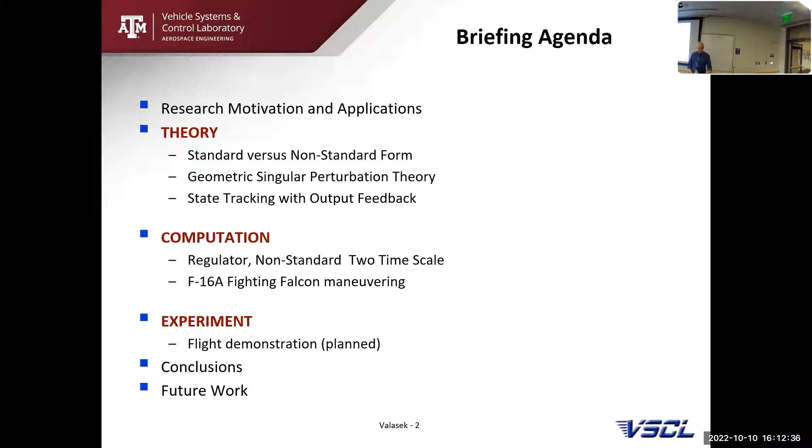For the lab, just really briefly to talk about the things that we do, you can see all of those. The two newest ones are quantum control and cybersecurity. I'm getting into quantum control because I have a student working on that for his dissertation, and he's already got two journal publications. That's brand new, he started with me in June. And then the other thing is cybersecurity.

We've been working on cyber controller acquisitions, which is the nice word for a hack attack on it. That's to be able to take over UAS. We're not touching GPS at all, this has nothing to do with GPS. This is saying, can I go into the controller, can I take over the controller and make the system do what I want? And the answer is yes. We've developed the theory on it, have several publications already, and we've been flying it a lot.

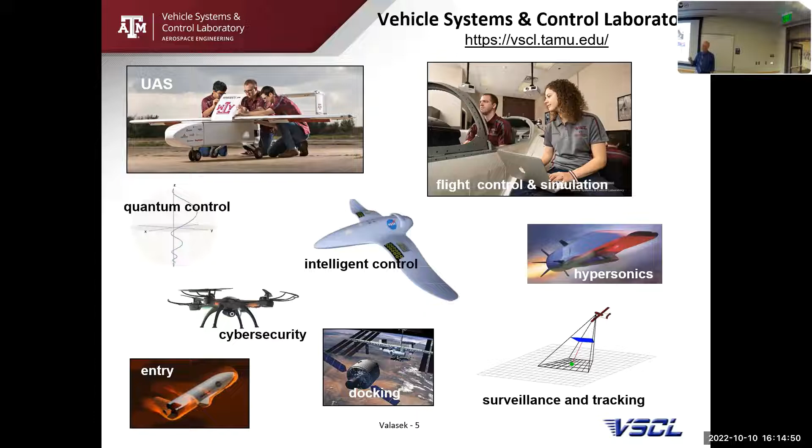The nice thing about it is you don't really have to have much information on the controller, you just have to get it on there. So we're not doing the vector to get that on, but once you get that on there, it'll take over the controller. And again, nothing to do with GPS on that. So that's kind of new.

For the field expertise, we've been flying UAS for a lot of years, 23 years, all under FAA there. I've done a lot of flights and a lot of programs and been flying a lot of different vehicles, rotorcraft, fixed wing. That one's a 450 pounder, the powered parafoil.

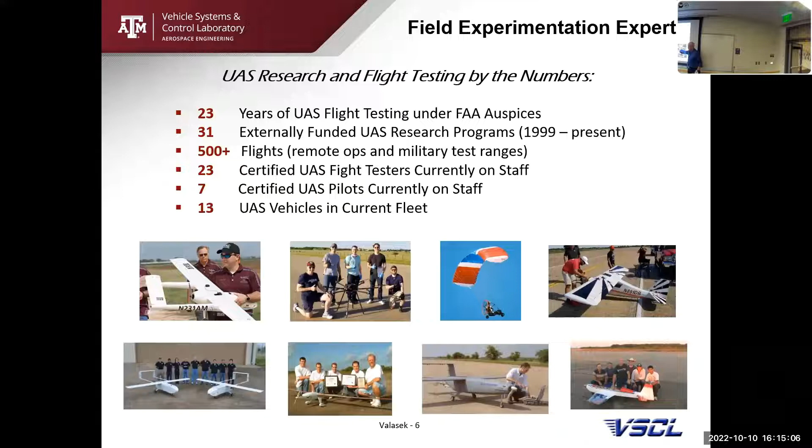Before I start the presentation formally, that's now our background. I want to recognize somebody. This is an alumnus of your department.

Dr. Jan Roskam got his PhD in 1965. He passed away three weeks ago, just after his 92nd birthday. World famous, he has taught airplane design at the University of Kansas since 1966 and taught it internationally. They said they put together 11,000 people he has taught airplane design to. A real giant in the field, nice guy. He was on my master's committee and he was on my PhD committee too, as a committee member. So you guys are very honored to have him as an alumnus. He worked at Boeing at the time and then was getting his PhD after doing that.

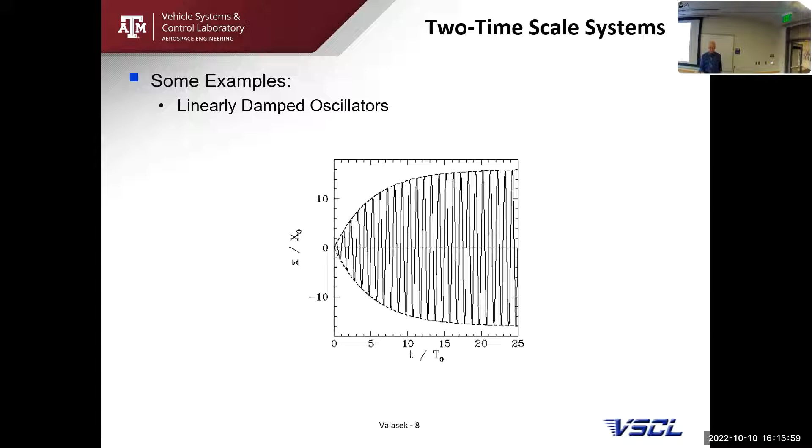Okay, so let's talk about some two timescale systems. First, I can have linearly damped oscillators, and those are not too terribly interesting. I can have a flexible beam where I'll have the beam motion as you see theta moving, and then I'll have the tip deflecting. If I go into the aerospace example, now it gets a lot more interesting because I have phugoid on the top, short period on the bottom.

So phugoid is going to be a very low frequency, low damped mode, short period high frequency, high damped. You're going to see phugoid expressed in velocity and pitch attitude angle. You're going to see short period expressed in angle of attack, and then a body axis pitch rate. So when you're looking at the scales on these, it's a little hard to tell, but you see up on the left there, the vertical goes to 8,000 on phugoid, and this one is like to 80. So you're off by at least an order of magnitude.

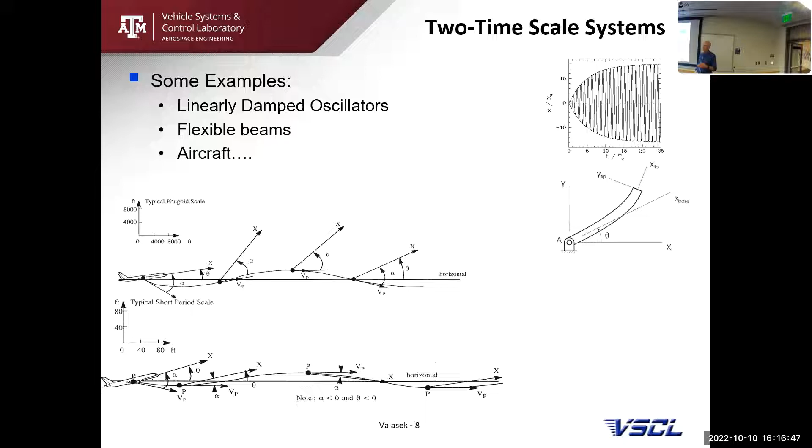Typical short period frequency is going to be about 2.5 radians per second, like for a fighter, and then phugoid is going to be sitting right at around 0.1 to 0.05 for that. So big separation in that.

And when you look at the time histories, there it is, the one that's out of a well-known book. So there you see again, velocity keeps going long term, and the short period damps out very, very quickly.

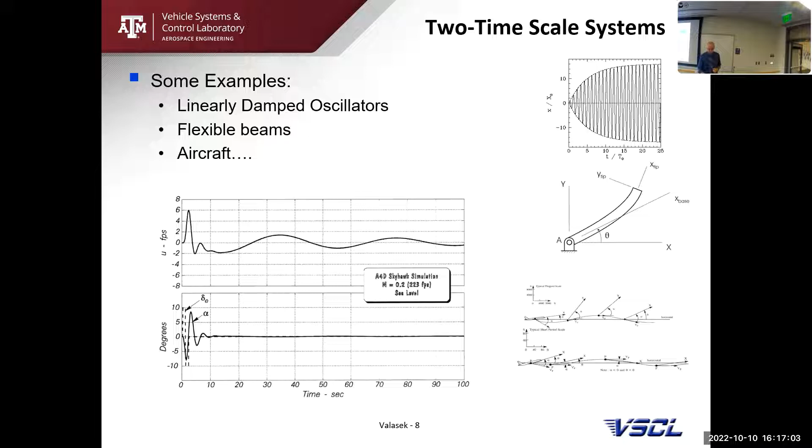If we look at this now for the flight control problem, here the dots are missing - dang it, that's sigma dot and omega dot. So if I have something that's going to be a typical F-35 fighter, we're typically going to model it as affine in the control, and P is just going to be some parameters there. So we can typically model that as nonlinear.

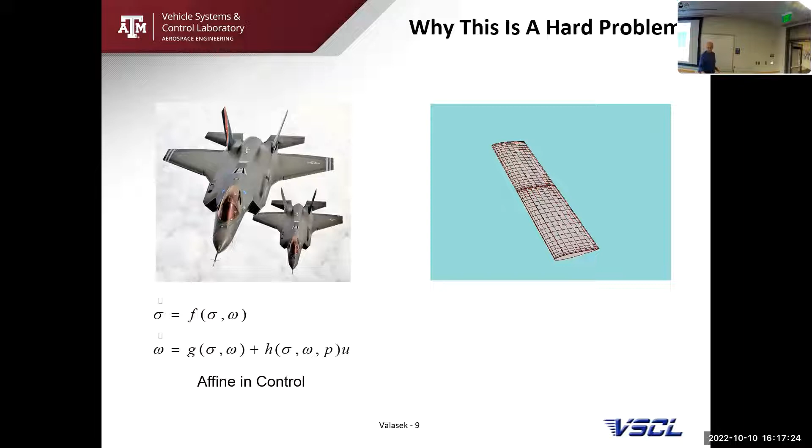If I go to something like a morphing vehicle, this is a grid model showing how a wing can morph into different shapes, 10 independent morphing degrees of freedom to be able to do that.

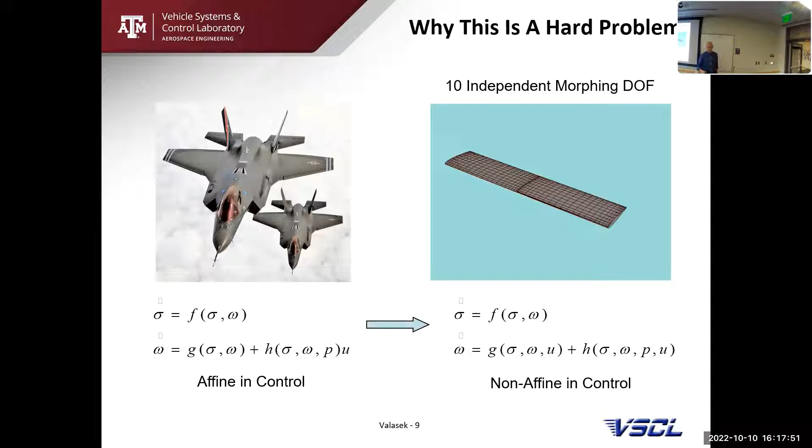Then when I make those assumptions and pop through with that, that's not going to work, because for this now I'm going to have this separated out and it'll be non-affine to the control. And we typically will do high performance aircraft, commercial air transports they're affine in control.

So the issues are that I have multiple time scale behavior, like I've shown. It's going to be nonlinear in control to be able to make it work. Real time onboard control and time varying unknown dynamics. So the typical things to do are to gain schedule, do offline pre-computed control, and then go after linear system representation. So the two that I'm going to be talking about the most are the timescales and then linear system representations for these.

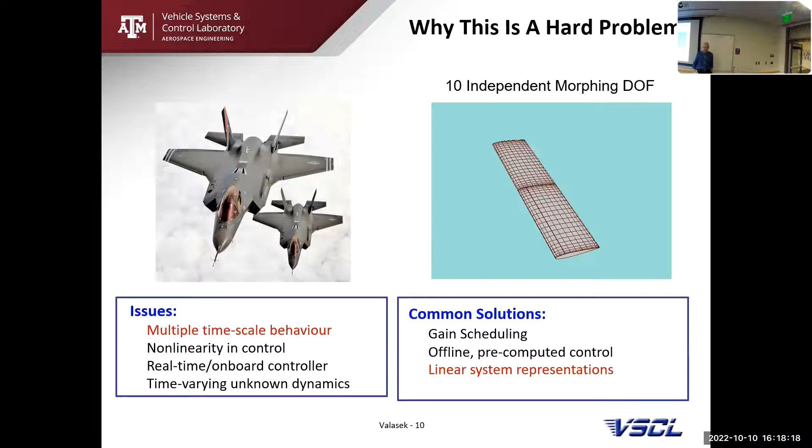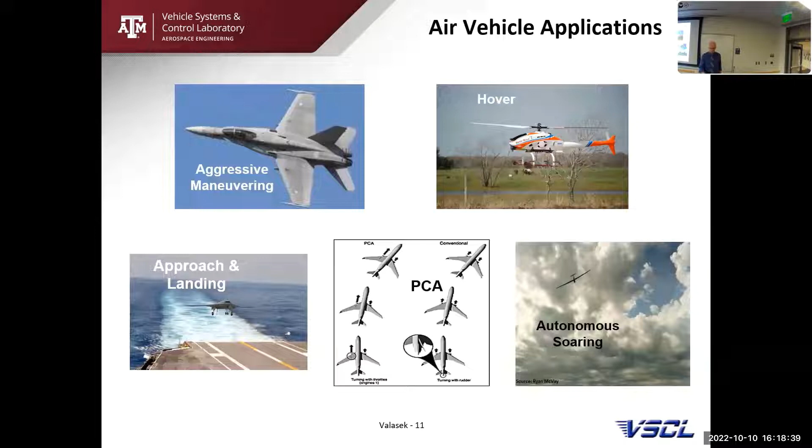There's a bunch of applications for these. Aggressive maneuvering helicopters have the same kind of problem too. The PCA's propulsion controlled aircraft that NASA had done several years ago and flight tested - that's using the engines as a primary flight control to steer it for heading and then also in roll for that - and then autonomous soaring. So there's a lot of applications.

Okay, the theory to go after this is the following. If I've got a particular system where X are the slow states, Z are the fast states - and that's supposed to be an epsilon, the character fonts are completely out of whack here, and that's also an epsilon right there too, it's not a dot, that's just epsilons - so I've got slow states, which are X, fast states, which are Z, and the singular perturbation parameter sits in front of the fast states, and that's going to have a value between 0 and 1.

If epsilon is going to be 1, then X dot and Z dot are all occurring at the same time scale. If epsilon is going to be much smaller than 1 heading towards 0, now what happens is I take 1 over epsilon, which is 1 over a small number, and on the right-hand side that's going to be a multiplier that's going to make those dynamics go much faster. And in the limit, if I have infinite separation, that will be when epsilon goes to 0.

So what you do then is the typical analysis is to say, I'm going to set epsilon equal to 0, get my infinite separation. Now this is going to be just strictly a function that I have to find the zeros of, and that's still going to be a differential equation.

The non-standard singular perturbation model is going to say that I don't have a unique real root for the fast states, infinite manifolds. You don't have results in the aircraft literature, except - this slide's a little old - it's ours that are in there. And finally, Fridman started studying in 2001 a way to regulate that.

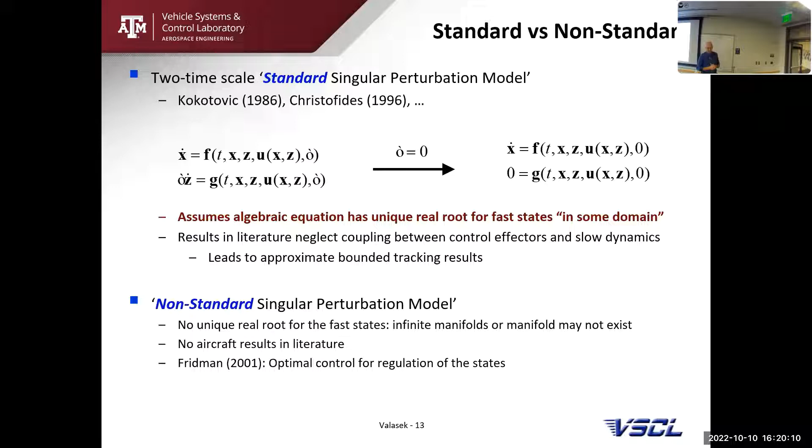So here's what it looks like. If you look at the standard systems, one class is where fast dynamics are linear in the fast states - you see many, many works going back to 1952. Non-standard is literally saying: if the fast dynamics are also going to be nonlinear, that's when I have non-standard, and that's going to be a lot harder to do.

So Narang-Siddarth, who was my PhD student, worked on that with me in 11, 12, and 14. We had some things published in that.

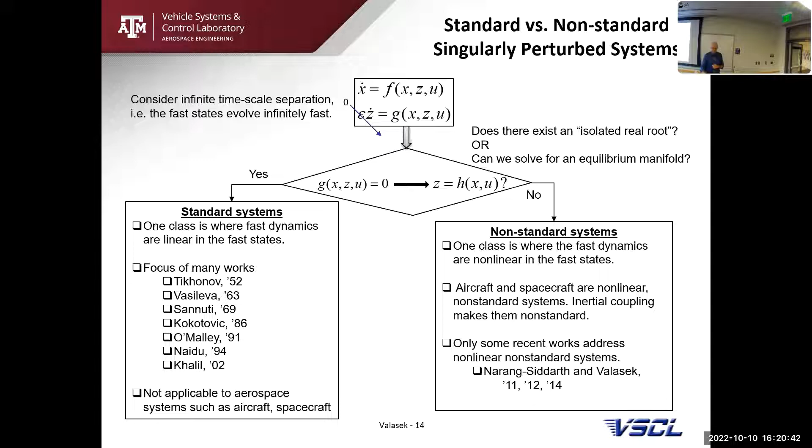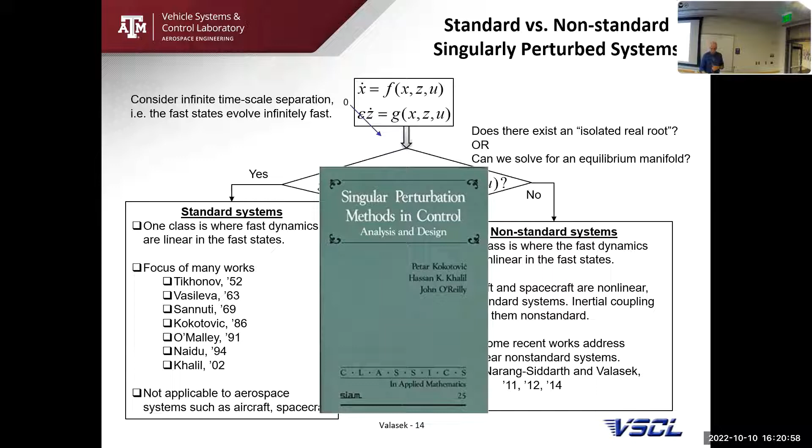Okay, and this book, I always point this out - Petar Kokotovic, Hassan Khalil, and John O'Reilly. This is a reprint of an earlier text with SIAM. This is Singular Perturbation Methods in Control - this is like the primary book that was done. But when Kokotovic and those guys did that at the time, they were doing the standard systems, because you can get solutions for it.

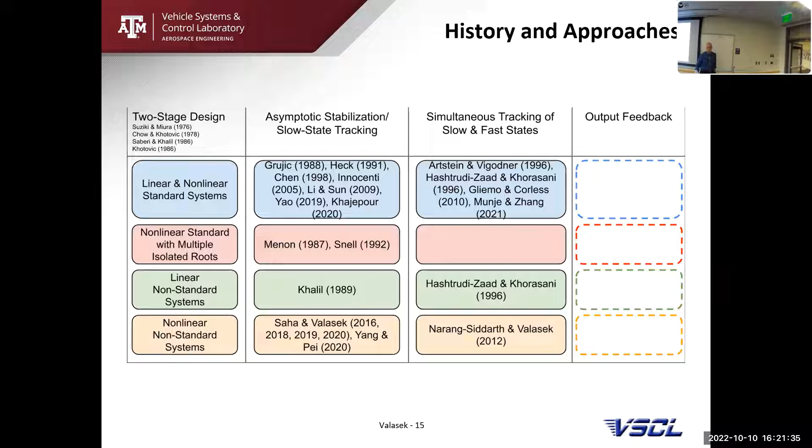Research-wise, if we look at what's been done and not done, here you see these two-stage design, asymptotic stabilization, simultaneous tracking of slow and fast, and then output feedback. Narang-Siddarth and I did this in 2012. Saha, my other PhD student, did some of that. Notice what's sitting right here - everybody had been doing full state feedback and nobody had been doing output feedback on this. It's just sitting, and there's still that one right there - simultaneous tracking, slow and fast with multiple isolated roots. So this is showing where there's a need to go after that, and that's what we're doing in this presentation.

So if I have this system, the slow system states are going to be X's when you see that. Delta 1s are going to be slow actuator states. Z are fast states, Delta 2 are fast actuator states. And the timescale parameter, epsilon, is going to go between 0 and 1. So there's what I have - the slow states, the slow control, delta 1 dot, the fast states, and then the fast control. So they're all differential equations.

The objective here is I want to track a reference trajectory as time goes to infinity - pretty standard stuff to be able to do that. So this is going to be very typical for aircraft or some other kind of system, spacecraft, where I've got slow and fast actuators.

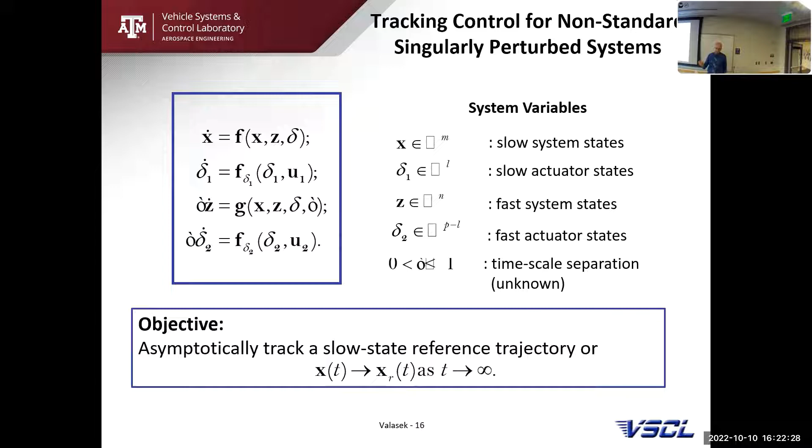Now here's where the geometric singular perturbation theory comes together nicely. Fenichel did this in 1979. Everybody looked at Tikhonov because Tikhonov was looking at these to say, if I'm linear in the fast states, I'm going to have real roots, roots to these things that exist, and I can just go after and get those roots. What you do is you take those for Z, solve for Z, because you have 0 equals that.

For Z, plug it back into the slow state equation, and that's how you get it. Now if I go to the geometric singular perturbation theory, I'm using manifolds, and it's all about that. This is really nice how this works out. So you see the derivatives with respect to the slow time scale t. I have x1 dot is equal to minus x1 minus z. x2 dot is minus x2 minus z, and epsilon z dot is equal to minus z. If I now create a fast timescale derivative tau, you see what I have on the right there - I don't have to read those to you. But here's what I do for this now.

If I substitute epsilon equal to 0, I have the slow subsystem. Notice what happens now: x1 dot is equal to minus x1, x2 dot is equal to minus x2, z is equal to 0. What is this saying? This says that when the slow system is evolving, so when these slow states are evolving, there's the differential equation for how they evolve - the fast states have already gone to steady state, that's why z is equal to 0. So you saw the examples I showed earlier - when the fast states are going really quick and then they're gone, the slower is still evolving. So that makes total sense for doing this.

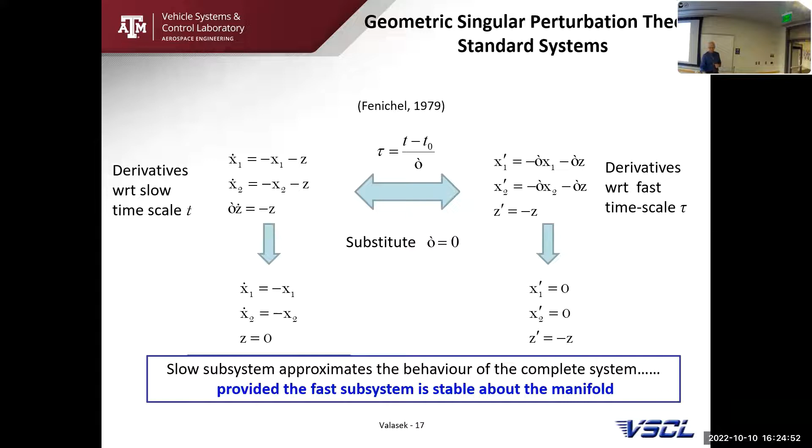Okay, so what that looks like graphically is this. There's the same two things, the fast and the complete slow subsystems that I have. And what this is just showing you is like a phase portrait, but it's in three space. The complete is going to be the blue, the slow subsystem is in the pink, and the black is going to be the fast subsystem. So that's just showing graphically where it is.

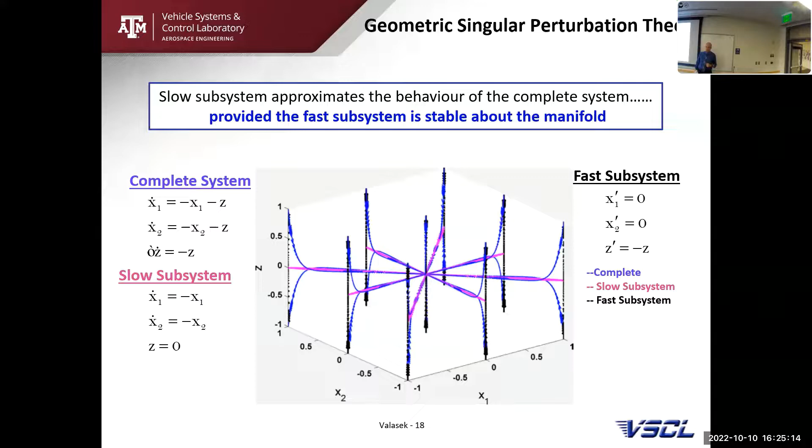The neat thing is that if you use the version Tikhonov did in the 1940s, which everybody's been using, you get to exactly the same result—you just have to have isolated roots. If you use geometric singular perturbation theory, you get the exact same equations, but you're using manifolds, and using invariant manifolds you'll get to the same thing.

Now you're not having to worry about whether you have roots of the fast states, that fast differential equation. That's what allows you to get away from having the fast states be linear—they can now be nonlinear. So the two-stage composite control has been done for a long time, and you break it into slow and fast. Modified composite control, we did that, and we get bounded tracking from it.

Let me say why this sucked, okay? You're having to approximate the manifold—everything's about the manifold here. So a tremendous amount of time was spent approximating the manifold and then ensuring everything converges to it. We did that a lot. What you really find out is there's a better way, which I'm going to show you in a minute, because approximating that manifold just took forever. And then there's approximate tracking, which just neglects those terms.

So here's what it boils down to. If I put this into error coordinates, the analytical construction of the manifold is not possible. You can't do it, but you can approximate it with a lot of work.

If I have lack of knowledge of that timescale separation parameter—there are journal papers out there where people spent an entire paper just to find that value of epsilon for one case. For aircraft work, this was done about 30 years ago, using wind tunnel results at some flight velocity, to say epsilon has a value of like 0.5. That's an entire journal paper, and they took a ton of time to do that. So it's not practical to get that.

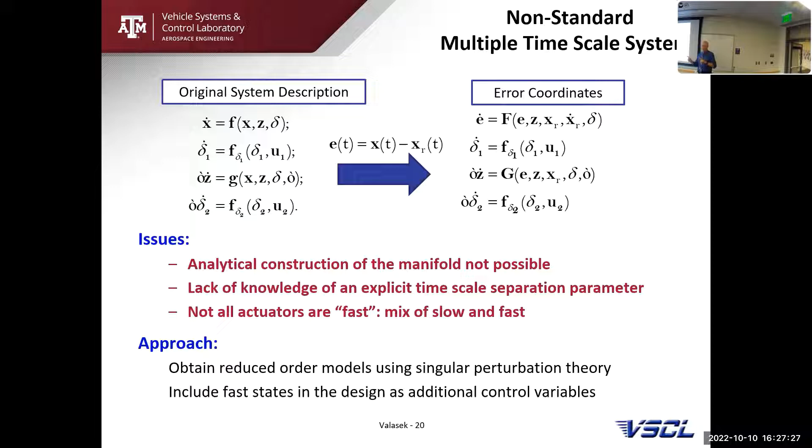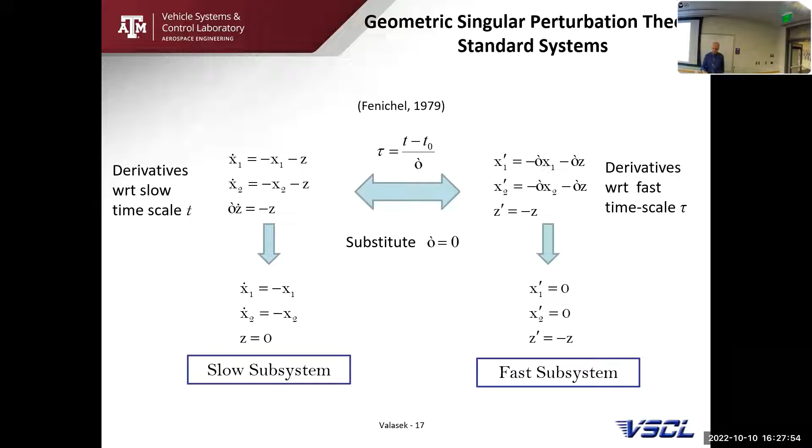One thing I forgot to show—I'm going to go back to this, something important here. Notice what I get out of this: I have three derivatives up there in the original system, and this is now reduced order. I'm always going to get reduced order, because no matter how many states I have with differential equations, I'll reduce it by one. That's always going to be true. So this doesn't suffer from curse of dimensionality—I can have a bazillion states, but I'll have a bazillion minus one to deal with. That's a nice thing.

Now, the big idea—if you've seen the VeggieTales cartoons, you know about the big idea and everything for that.

This was inspired by Lyapunov-based control, because one way to do it is: design my controller, then come up with a suitable Lyapunov function where it's positive definite and its derivative is negative definite. That's great. The other way, which is nicer, is to define a Lyapunov function first and then set up a controller that always maintains v positive and v dot negative. That's the better way to do it.

That's what inspired this, because we spent so much time trying to approximate the manifold. We finally realized, why don't we just pick the manifold? We know what it is, pick it, and then make the states track it. So that's what we did for this, okay?

The other part is, by doing that, I can take the non-standard form and convert it to standard form. Let me be clear here: we're not inventing the controller that's doing this—that's not what we're doing. We're enabling the ability to take the non-standard form, convert it to standard form, and then use all those different techniques people have been using since the late 1940s. So we're actually enhancing the class of systems they can apply to.

The other part is to develop an approach that is independent of the perturbation parameter, independent of epsilon, because you just don't know that—it's very, very difficult to obtain. So those are the two big ideas.

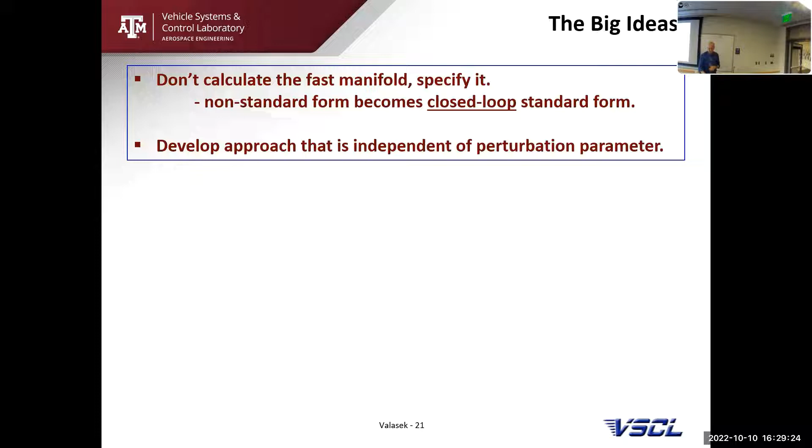So the first step in this, I'm going to go a little fast through this because it gets a little bit tangled up. I wanted to determine the slow control that's going to be a function of delta 2 to the 0. Those are manifolds, anything with a 0 subscript will be manifolds. Those are the references that it's going to be going to. And I'll get z 0, the fast state manifold, then to stabilize the slow subsystem.

Second step, I'll determine from that. I'll use that manifold, and then also Z, the fast states manifold, and U2. Notice what I'm doing - I'm using the manifolds then as a control input to do this. So that'll stabilize the fast subsystem about the manifolds.

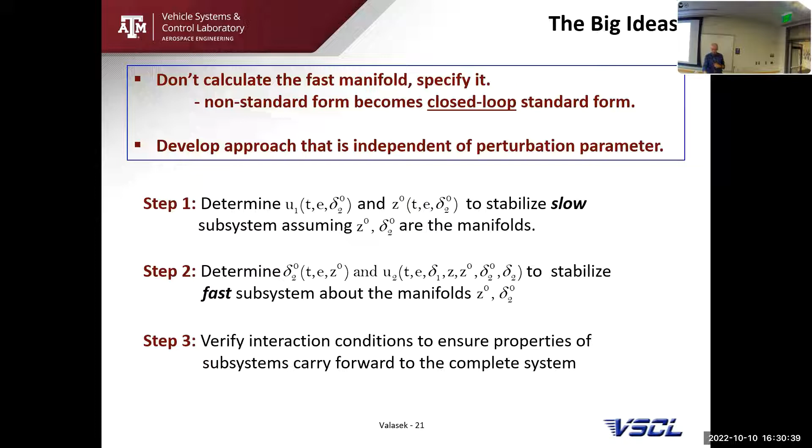And then you just have to verify interconnection, interaction conditions. What's that doing? That means when I set epsilon equals 0, I have the fast, I have the slow, but I'm violating - I'm doing a violation because remember, in real life, that epsilon does not go to 0. It has some value, like 0.5 or something, actually usually a lot smaller than that. So when we set that equal to 0 to get a controller, we're fudging it. So this is now making sure that by doing that, I can take care of the spillover, so to speak, that I have from doing this with the slow and the fast state. So that's what it's taking care of.

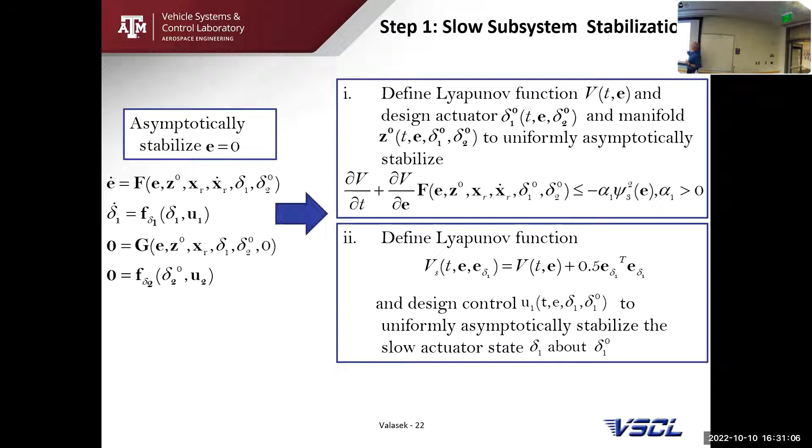To do this, you can use any control technique that you want to. We decided to do it using Lyapunov-based methods. Why? Because it goes fast, it's easy, and I can prove stability very easily with this. So you're seeing over here with epsilon equals to 0 and it's showing up as E. There's my slow system right there. So I define a Lyapunov function V. There it is - design the control to uniformly asymptotically stabilize about it.

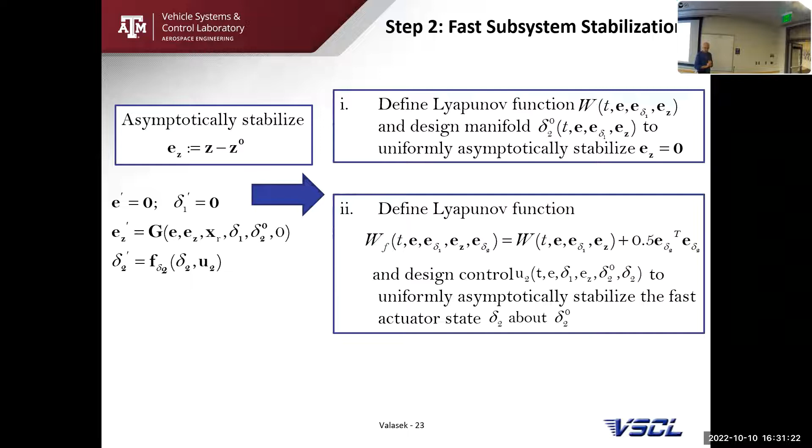The fast subsystem, I'm going to asymptotically stabilize the error between z and the fast states and their manifold. These equations on the left are just exactly the same ones you were shown before. So same thing, I'm defining a Lyapunov function to stabilize it. And then here's the interaction conditions.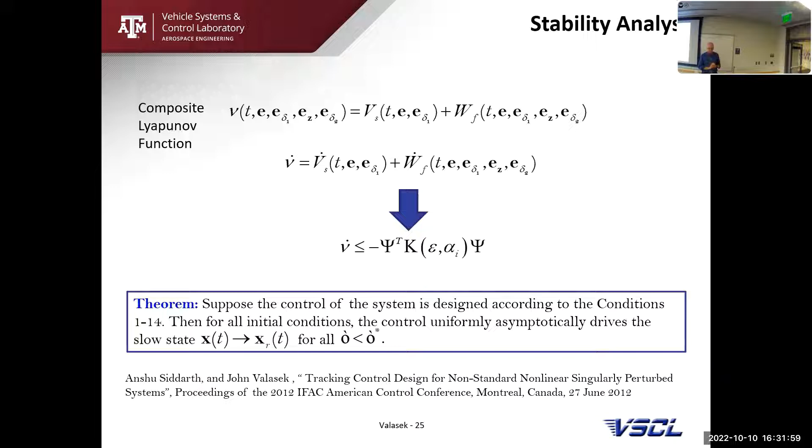But there's my Lyapunov function. There's V dot as a quadratic form, which is, of course, the easiest way to do that.

For the computation side, here are the two examples. I'm going to show just number one, how it works. This one, I'm just going to show you the video from this one. I'm not going to show you the whole design procedure because I'm going to do a more detailed one for this. So the first one will be non-standard 2-time scale, a benchmark system. I have infinite manifolds, so GSPT does not apply directly. I'll convert from the non-standard form into standard form. The second one is an F18 example for this non-standard, non-linear.

I don't know what epsilon is. I want to force the slow states to track a reference. What are the slow states? Those are going to be angle of attack, side slip angle, and P, Q and R, the body axis angular velocities. And force the manifold to be the fast state reference using two-stage design, and there's no assumptions.

I want to say another important thing about this - no linearization, I haven't really said that. We're not linearizing anything - no linear models on this. We're staying nonlinear during the modeling and the synthesis.

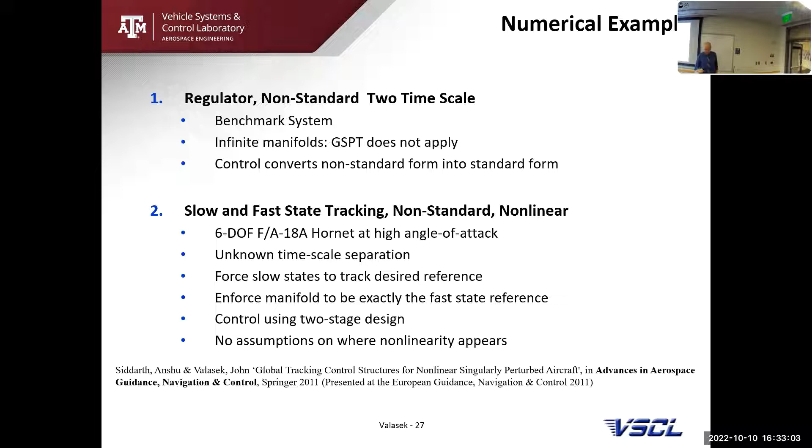Okay, so here is the system that's up there. It looks really, really simple and it's kind of suspect up there. X dot is equal to Z minus U.

Z dot is equal to X plus U. So I'll do this slow subsystem stabilization by designing a manifold and solving for that. The fast subsystem, I'll design the control, and then there's the manifold computation.

It's pretty easy. So here's the system that I have, and there's the closed loop version of it. Now what happens is when epsilon is equal to 0, notice what happens. I still have this, it's in standard form. But where this was non-standard form because it's nonlinear, now I just have minus alpha sub 3 EZ. So there it is, now it's linear. That's what you're talking about, using the control to linearize it.

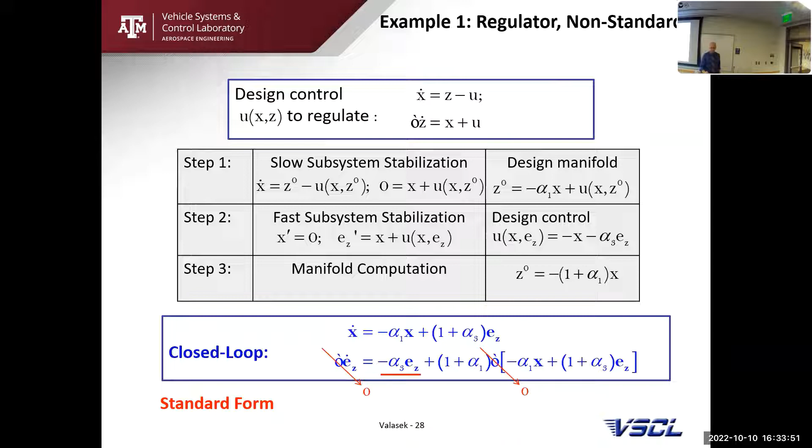Now I can use whatever method I want. We showed this, that for different values of epsilon, we can solve directly. If I pick alpha 1 equals 1, alpha 3 equals 2, I get stability guarantee for all epsilon less than 0.32. And if I go back up here, look at the phase portrait, you see the different values of epsilon, positive eigenvalues.

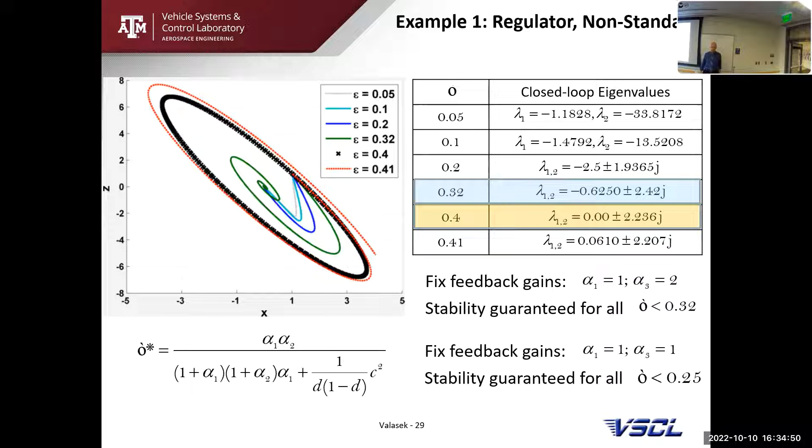So the good news is I can do a lot of good things. The bad news is it's hard to pick the gains for this. There's no Bode, no root locus, no Nyquist. You're having to just somewhat ad hoc pick these, but it's very powerful. All I need to know is that epsilon is less than 0.32, and I'm going to be good to go, even if I don't know what it is. So that's another powerful part.

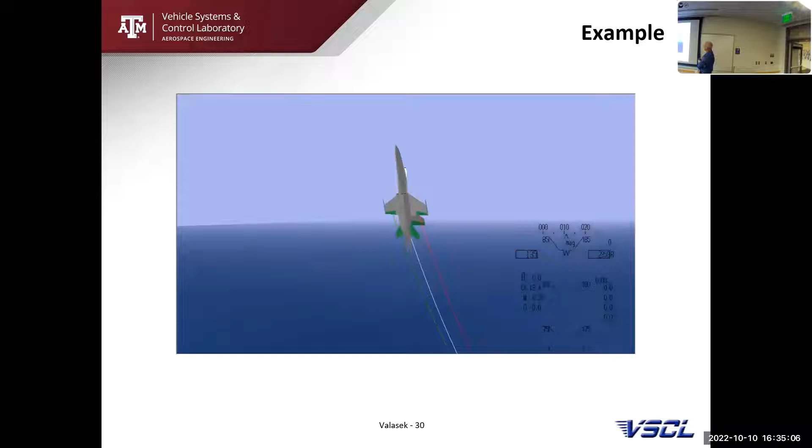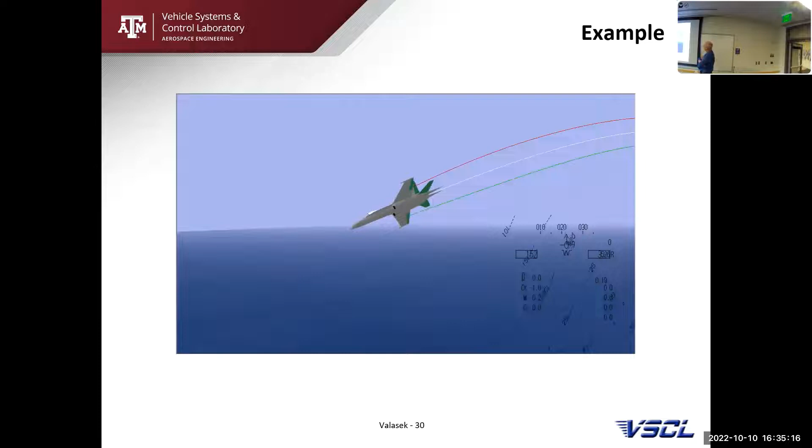Let's hope the video plays. Oh, it is, so I'll play it twice. This is an F18 using this technique, pitching up into a vertical climb. It's then going to pitch over. The velocity is going to get very close to stall, very, very low. Then it'll roll, and then dive, and then do a pullout for this. Okay, and there it is.

That is done using this technique, and the neat thing about it is no linear model, no gain scheduling. We're doing this, and the controllers, everything's nonlinear the whole time. So I'm able to do a nonlinear high amplitude maneuver completely nonlinearly.

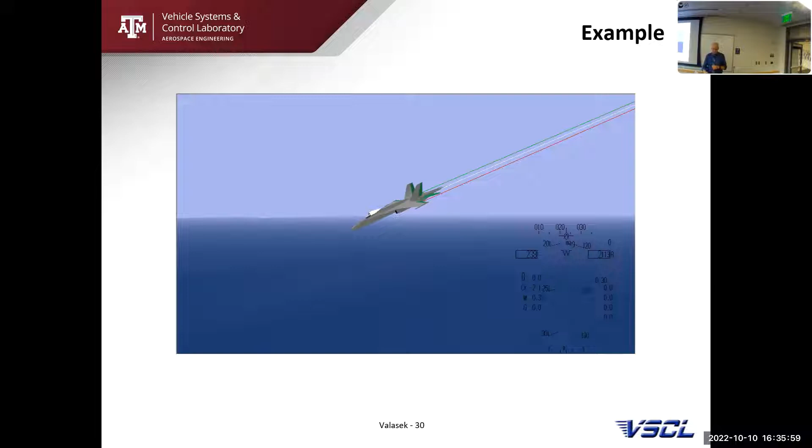But the problem I'm getting, the thing you don't get for free, is if I get linear models, I can gain schedule and stitch those all together. They're easy, this is hard. So what I'm getting is a lot of computational overhead to do this too. I'm paying for it computationally, and the difficulty of synthesis. But the nice thing about it is that I can get a nice working example.

And we're doing, based upon what I'm showing you, the second edition of this book is being worked on right now. It'll come out in about 8 or 9 months. And it's not going to replace that, it's going to double the size of it because we're going to do the output feedback problem on it.

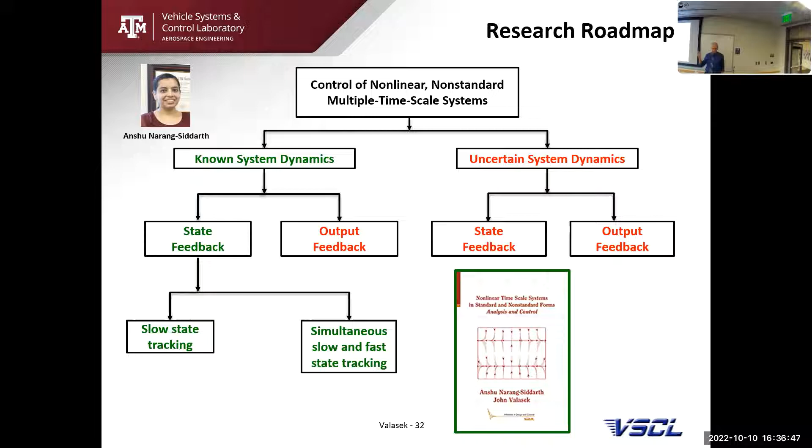From the deterministic side again, looking at this, if I look at the output feedback on the known system part, I can do slow state, fast state, linear combinations of those. Let me tell you why this is hard.

When my other students started working on this, we planned this to go in about 3 or 4 months. The idea was I'm just going to measure the slow states, use that. I'm going to measure the fast states separately, just do that, and then the combination of those. This was really tough because estimating the slow states on one of these systems is difficult. Just the fast is difficult, and the combined slow and fast is hard. Each one of these turned out to be really hard.

Here's a good example about when you submit journal papers or a conference one. We submitted a paper to ACC, American Control Conference. We had an estimator working on the slow states and one other one estimating the fast states. Submitted it to ACC, paper rejected. Review comments came back, paraphrasing: what a bunch of idiots, you guys should not design an observer or estimator to estimate the slow states separately and the fast states separately. Put them together. There's no reason to separate it. What a dumb idea, okay?

So the next year for ACC, what did we do? We put one estimator, with a lot of work, estimating all this together, submitted the paper. What do you think ACC came back and said? Rejected.

Reviewers came back and said, you idiots, why would you ever think that one estimator could estimate slow and fast? Clearly, those should be separated into two separate ones. This was such a horrible idea. I can't believe you did that.

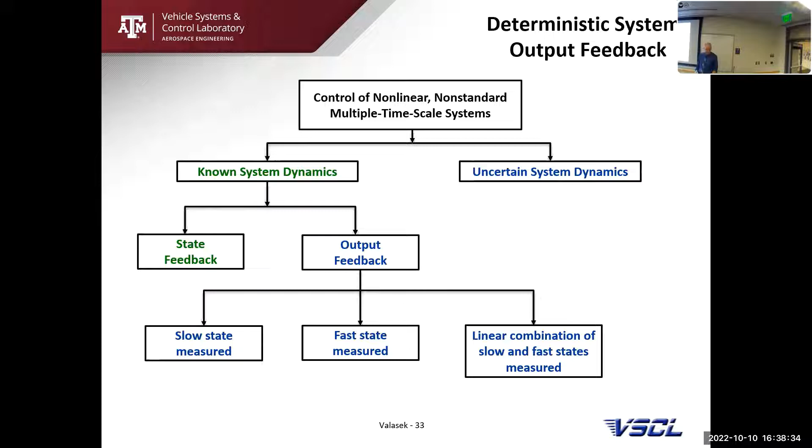Okay, what do you do? So what we did is we just didn't submit to ACC for a short period of time. We just got it out of their system, okay? So here's Dipanjan, and this is now his dissertation work we're talking about.

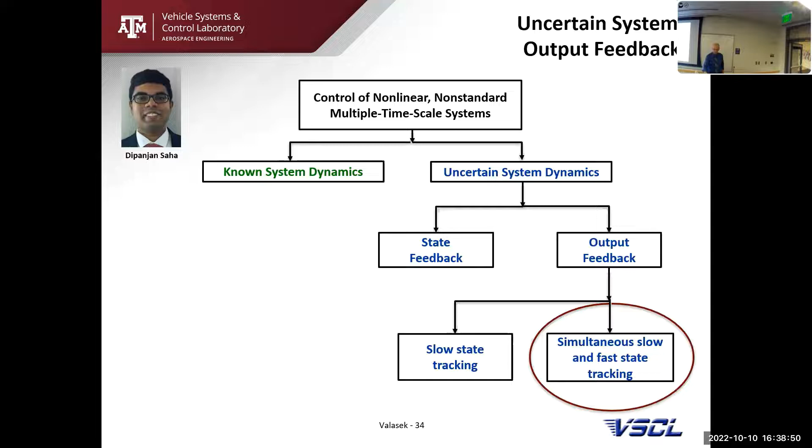So we're over here for the uncertain system dynamics. I can have state feedback, output feedback, slow state tracking, and simultaneous slow and fast state tracking. Those are the tough ones. Now, if I look at these for the tracking types, I'll just summarize this. Over there, we did slow tracking on the generic F18, and then slow and fast on the generic F18. That's what I just showed you for that.

And that's using a two-stage design, no actuator dynamics, constant throttle. That's why it bled speed so bad when it climbed up. So Dupont and Saha, I call him Dipanjan, his first name. We did slow and fast generic, but we were able to add throttle as an automatic control and now command velocity as a state. From doing that, loss of airspeed was reduced with only 10% loss with afterburner.

And then finally, we did sequential control. We have actuator dynamics realistically accounted for. Throttle's a control, velocity is again. What do I mean by this realistically? The earlier work, we had actuator dynamics - they were just there. When we do it this way now each one of them has their own epsilon. So they are themselves properly modeled as a singular perturbation going in for the different time scales. So that's what we're saying.

And on this one, now we have a 90-degree left turn, 90-degree right turn, and we're tracking velocity, bank angle, pitch attitude angle, and then heading angle for that. And this is where I'm going to head in to show where that's at.

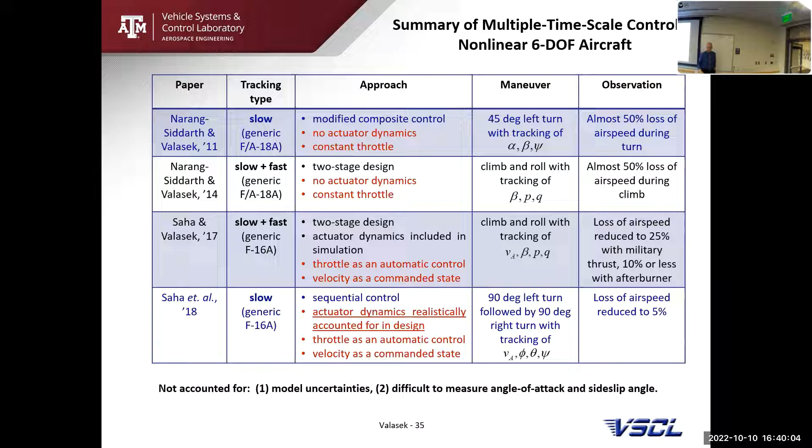So the slow and fast state tracking with output feedback. The approach is sequential control of online parameter estimation, nonlinear state observation. I'll talk a minute about why we did state observation. We have more unknowns to be estimated, parameters and states for this, and proving boundedness of errors in terms of the timescale parameters. So the solutions are the following.

I want to classify the slow states as measured and unmeasured - two different types. So I'll allow all slow states to be tracked, or kinetic states. That's U, V, and W, the body axis velocities, and they're measured. The unmeasured states are going to be not tracked, but they have stable dynamics. That's going to be angle of attack and side slip angle.

And then an unknown parameter and an unmeasured state do not appear in the same term. Mathematical expediency makes that a lot easier that way. And then the dynamics of the unmeasured states do not have any uncertain parameters themselves. So this is a little bit simplified to keep it nice, but it's still very, very realistic for that.

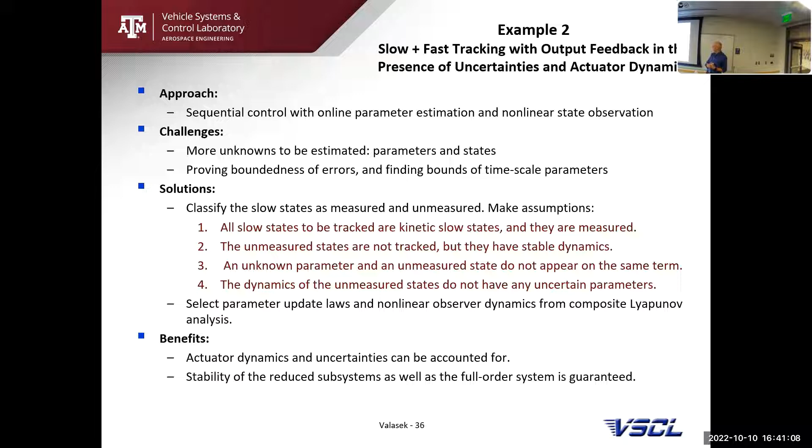Okay, so the benefits: the actuator dynamics and uncertainties can be accounted for. And I can now have stability, the reduced subsystems, the full order system guaranteed. So the features are, I can do 4 time scales, 2 slow, 2 fast, 2 for slow and fast actuators. I have multiplicative and additive uncertainties. Not all the states are being measured.

And by the way, this is pretty realistic. The 2 hardest things to measure on an aircraft are alpha and beta. They're not impossible, but they're not the easiest. They typically will take flow vanes for alpha and beta because they're aerodynamic angles, or you can do estimators and do things. But if you want to directly measure them, they're a little bit more work and they're noisy signals.

Okay, so Dipanjan likes to call them the products. I like to say what it results in. We get control laws, update laws for the estimates, nonlinear observer dynamics, stability has been proved, bounds of timescale separation parameters, and large-amplitude maneuvers of a four-time-scale aircraft.

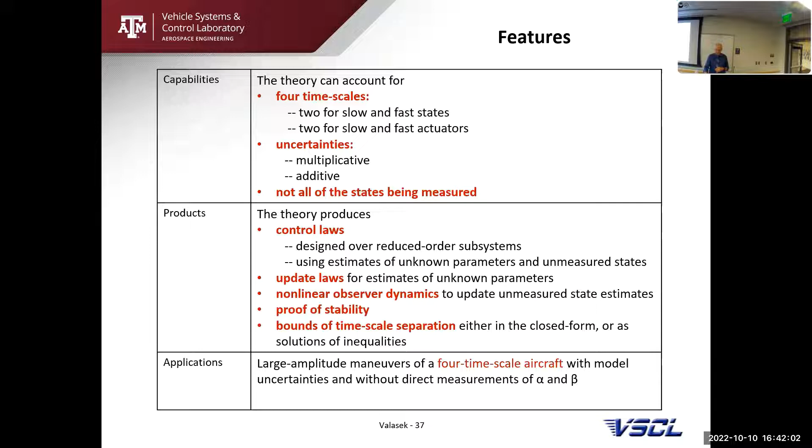Okay, now to walk you through, here's what this is doing. X dot, you see in the top row, is going to be the measured states. X dot sub U is the unmeasured states - that's what the U is right there. The gamma of X right there, underlined in the purple, the darker purple is going to be the additive uncertainty. And then in the control distributions, which are G's, will have multiplicative uncertainty. And you see that there's delta sub S, delta F.

So that's fast and slow, or slow and fast actuators right there. Notice I've not put any uncertainty in the unmeasured states, as I said before. The second slowest time scale are the slow actuators.

And now that's correct, the sigma should be there. That's very good, thank you. It finally came through on that one. So there it's slow actuator differential equation is.

The second fastest is the epsilon in front of the Z dot. So those are the fast states. Those are going to be the body axis angular velocity components, P, Q and R. And then the fastest time scale will be the fast actuators. You see a rho in front of that one.

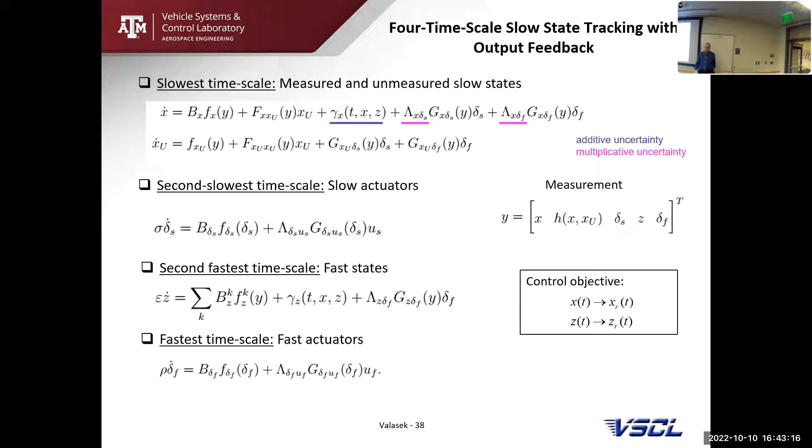So to stabilize, we're just going to put it into error, model it as error coordinates. And now the stabilization is just, you see right there, just plugging in and doing that.

The thing to point out too is I've got x dot r, that's the reference for the slow states, reference for the fast states, reference for the slow actuators, and then reference for the fast actuators. So the x dots, z dot, and delta dots are right there, the important part.

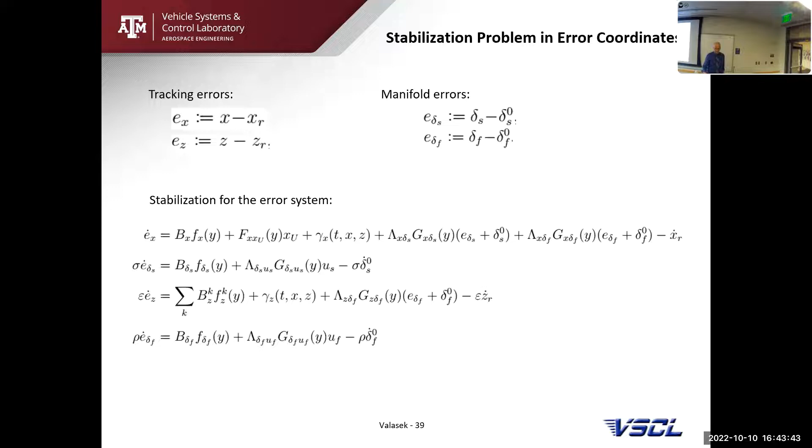For the parameter estimation matrices, the B is going to be the inverse of the inertia matrices, and then S is going to be just the inertia matrices themselves for that. Nothing too intense there for doing that.

We set up a composite Lyapunov function, and then all I'm doing is representing that in terms of the summations there for the traces to do that. That's just notation. And then I'll do the time derivative of these using the full order and reduced order model dynamics. Not too big a deal.

Here's the part where it gets interesting, and you're wondering why did we use this method from Dong and Kuhnert in 2005. This is commonly used in adaptive control. We didn't invent this, we're using it.

Here's why. Because when we were using timescale, we were using estimators, using process noise, measurement noise and stuff, the proofs got to be really hard in a hurry. And the proofs were worked on for quite a while. So another PhD student is now having that to be able to solve.

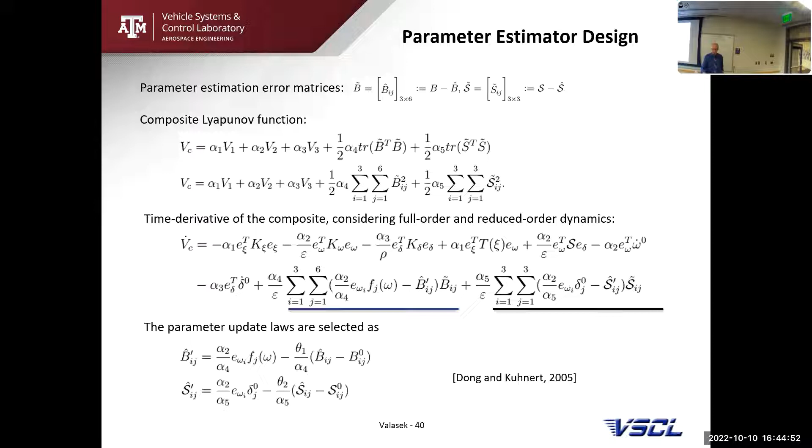So to make progress on this, we decided that what we're going to do is parameter updates using traditional ways from adaptive control, because this is not work about parameter updating. This is really work about the time scale. So this is just what we're using to be able to get that. So strictly taking it very, very typical out of that.

The parameter update laws have two components. One cancels an error term. The second one drives the estimate to a desired final value. This is just shown out to you for letting you see it.

The alphas are going to be gains on the vehicle, so traditional feedback gains, and the thetas are going to be the rate on the parameters, how fast they converge and do their thing. So they're all listed out.

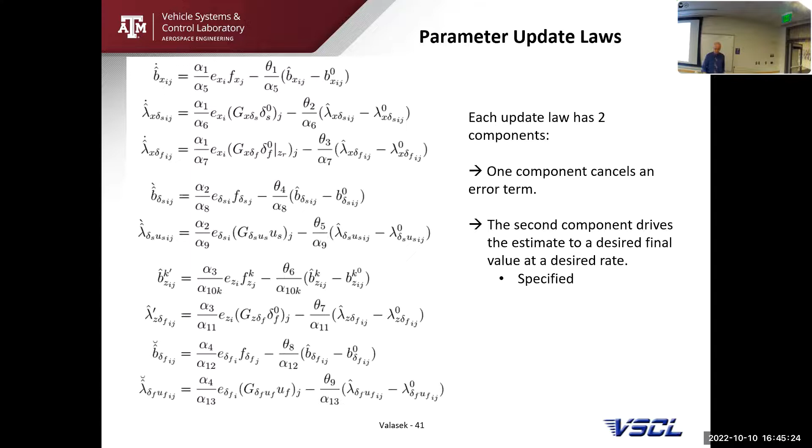So the computational part, when I'm saying this is more computationally complex than gain schedule, it's getting complex in a hurry. Okay, so here's what you do. There's going to be 3 of these to go through. They all work the same way.

I'll design the manifold of the slow actuator such that slow states reach reference. So estimates of unknown parameters, ignore additive uncertainty. They will show back up later when we have that.

So there it is, the reduced order model, and you see the estimates are now showing up. Get a Lyapunov function - I'm just using quadratic form, which is the world's easiest Lyapunov function.

Time derivative, select the manifold of this for the slow actuators. What happened between here and there? One thing - all you're doing is you have it right there.

Delta S0, the actuator, the manifold for the slow actuators - I'm just solving for it right there. That's all that is, to go from that whole line to that. Solve for that. Okay, and then stability for that, just to stabilize it.

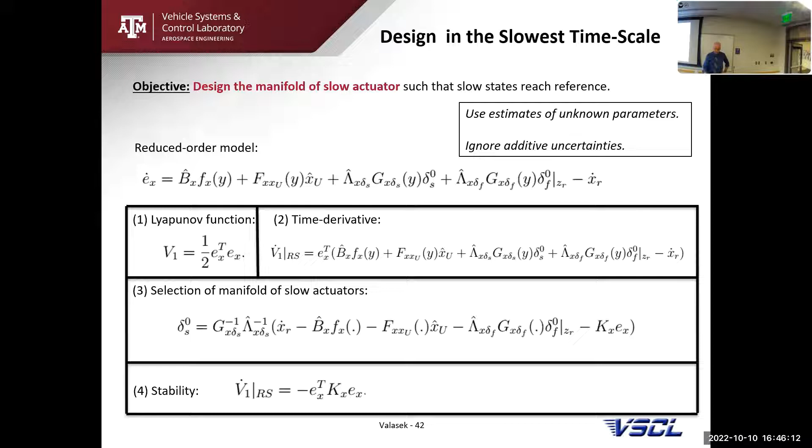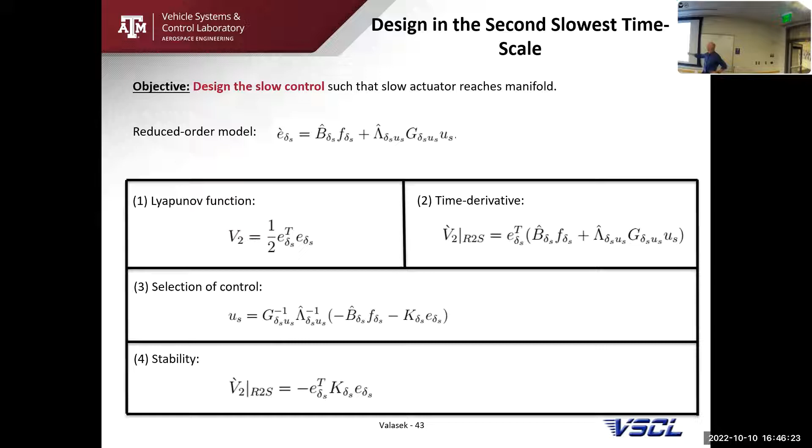Design the slow control using exactly the same approach, using the reduced order model. That's right there, doing the exact same thing. You're solving for U sub S in this case. There it is right there to be able to do that.

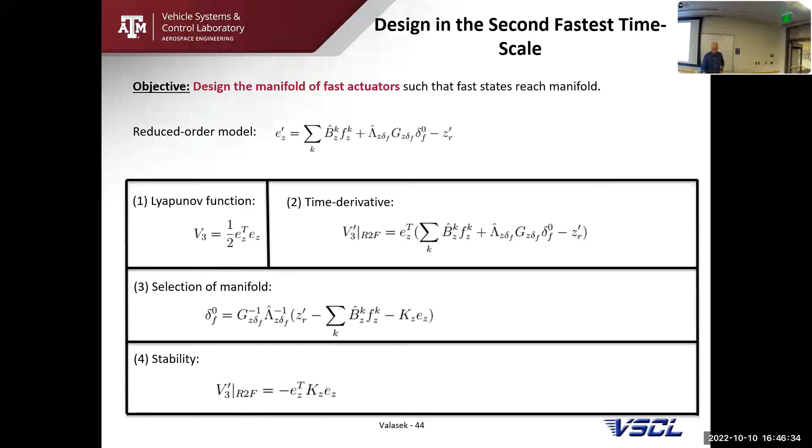And then manifold of the fast actuators - you're just going after delta F0 again, and then doing stability for that. So same thing. And then finally, the fast control, again, the same thing to do that.

This is pretty standard. The composite Lyapunov function is looking like this. Now here's the question: where does the observer come from, since we're not using process noise and measured noise to estimate? I'm adding this term, x tilde, the unmeasured states after errors on it.

This is what I'm going to use to derive the observer. It's going to come directly from this. Here's the composite Lyapunov function using summations instead of traces. And then I finally get to selecting the observer dynamics. So here it is, by taking v dot sub c, and here it is on the bottom.

So this is going to be x hat dot of u. That's it right there. I'm going to solve for that, everything else will be on the other side. So this is where the observer comes from.

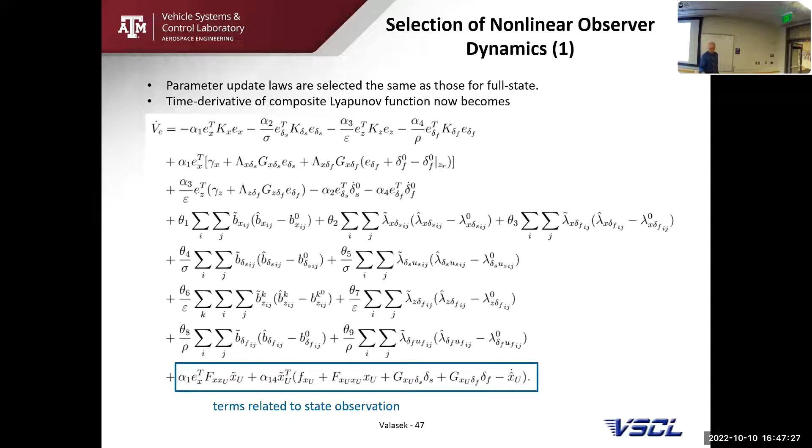From that, I'm going to have a term that'll cancel in v dot c, in the middle right there. This is just going to be a traditional Luenberger observer. So there it is: observer gain, x hat u minus x u. And then the middle term, called mimicking, whatever term you use for it, there's x hat u. This is traditional, canceling and then mimicking with that.

And then finally, to get ultimate boundedness, I can just choose L diagonal on that.

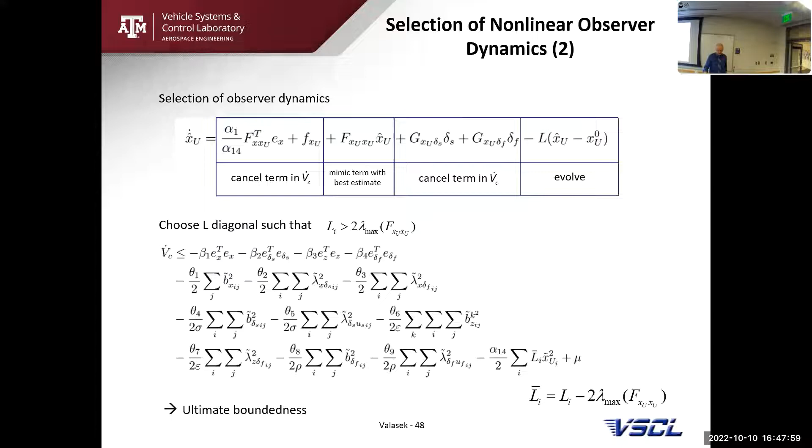So here's the example to show you where this is all going. I'm going to show you three different controllers. I'm only going to develop number three; I'm not going to show you one and two. Number one is slow state tracking with full state feedback, so all states are assumed fed back. Number two is slow state tracking with output feedback, like we just did. Number three, similar but simultaneous slow and fast tracking with output feedback.

The vehicle is going to be a nonlinear six-state, with time constants. Velocity is 800 feet per second at 15K, a nice flight condition for the F-16. We'll pitch up to 80 degrees in 10 seconds, hold 80 degrees for 10 seconds, return to nose level in 10 seconds, fly level for 10, 90-degree left turn followed by 90-degree right turn, 15 seconds return. Bank angle or pitch commanded to zero upon completion of the turn. You get 180 seconds to do that.

And as we're saying, we're not measuring alpha and beta, just measuring body axis velocities. The sources of uncertainty put in are, of course, set up this way. This will have a big impact on the results.

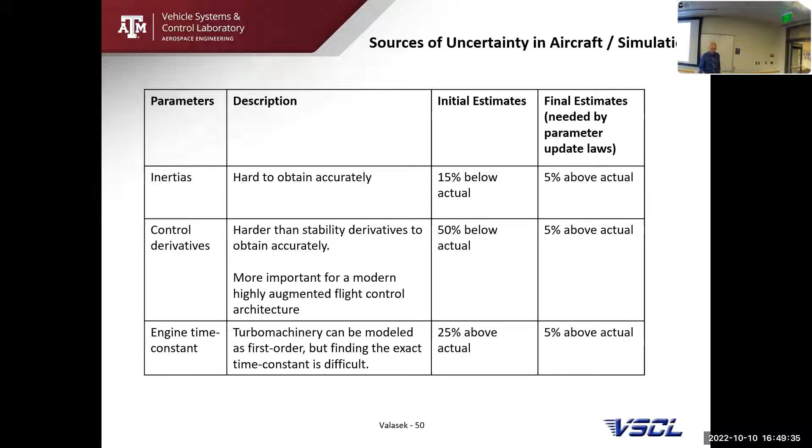For the inertias, I'm going to set those initially at 15% below; the actual estimate will be 5% above. Control derivatives, not the stability derivatives but the control derivatives, are the hardest ones to get—they'll start at 50% below and need to go to 5% above. And the engine time constant will be modeled there. So we're really throwing off all the estimates for the inertias, stability derivatives, and control derivatives for this.

So if you're looking at this and wondering, what's the point? What does this show you? Consider what's being shown.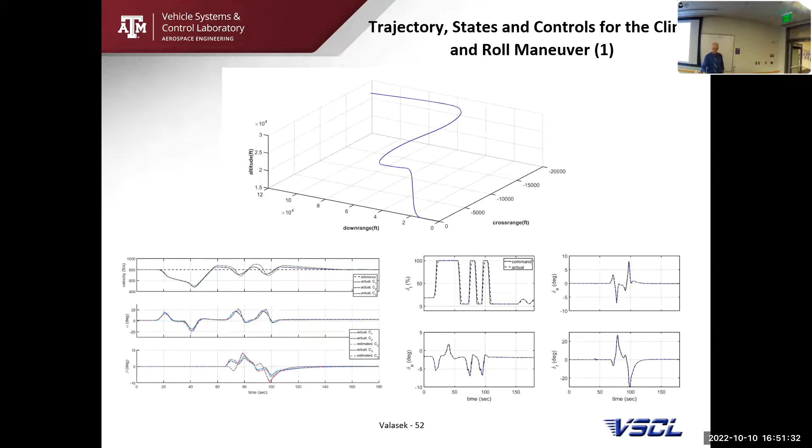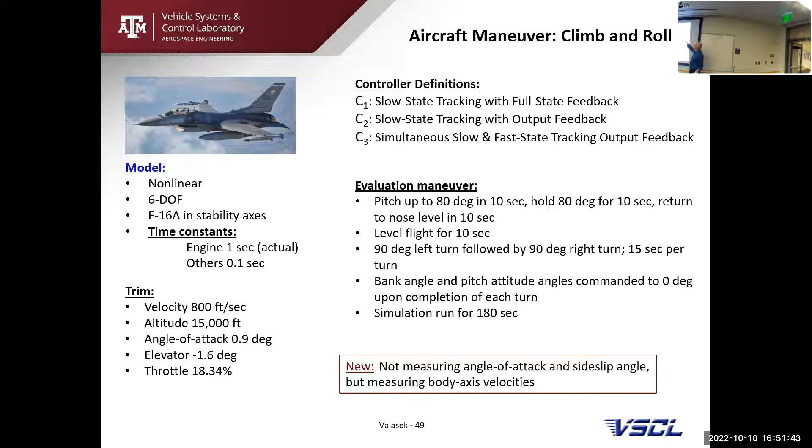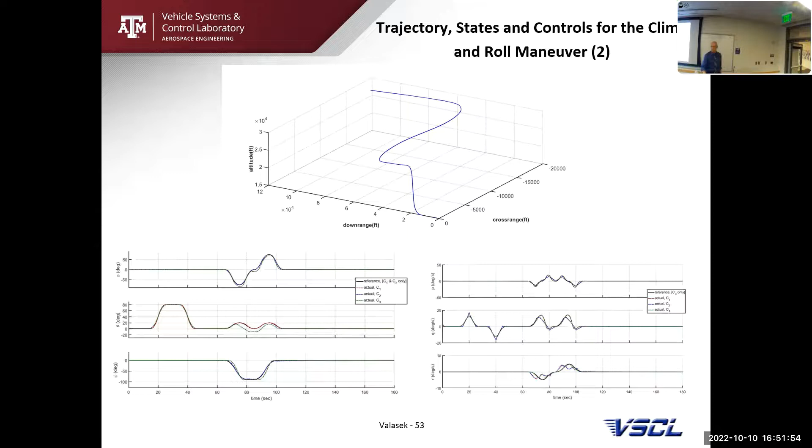The reason these are different is consider what's going on. When I'm doing slow state references, C1 is slow state tracking, that's alpha and beta. The fast state tracking is going to be P, Q, and R. Number 3 is alpha and beta and P, Q, and R, so you're getting everything combined. Compared to the red, the reason you're seeing it's different is I can now command P, Q, and R directly. The red one can't -- it's just commanding alpha and beta. That's why there's differences.

Here's the final controller comparison before we get to conclusions. If I look at C1, C2, and C3, you can see full state feedback, output feedback on alpha hat and beta hat, and then alpha hat and beta hat with states to track, slow and fast.

The number of tuning knobs, whatever it happens to be for N, and the dimension of the system -- more tuning knobs, less. But whatever N is, this will be N plus 3, this is N minus 1. So during full state, I have less design knobs I have to fool with. This did a climbing turn, this did a climbing turn, this did a level turn, close to level turn -- this is what you wanted it to do.

This one now had more controls. I could modulate pitch rate directly on this. Those two cannot modulate pitch rate, they're not able to do that. So pitch rate, I can modulate that control to be nose down. The velocity overshoot was higher, a little bit, but it's still subsonic -- it didn't go supersonic when it did that, compared to the baseline. No major change in heading.

The throttle energy, 6% less using this, but the aileron, 41% saving, 40% saving, more and more. So the answer is, which is better? Depends what you want to do. If I want to do awesome maneuvers and not be able to measure alpha and beta, and be able to command P, Q, and R, have a more sophisticated controller, I'm going to use more control energy. That's as simple as that.

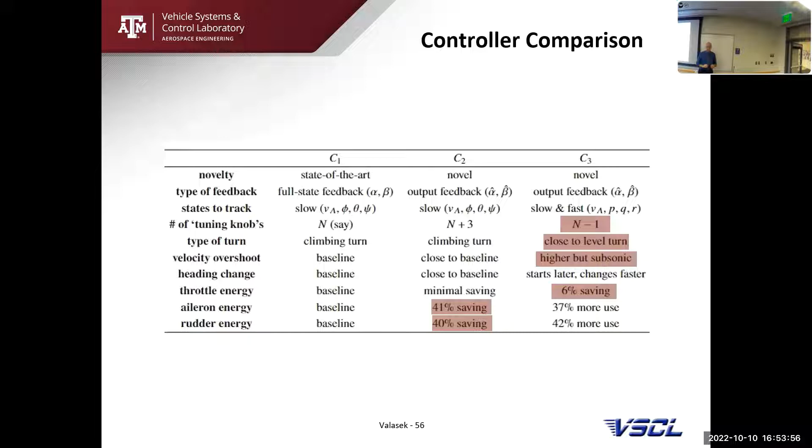So which one's best? It's up to you.

So the summary and conclusions: we've accounted for slow and fast actuator dynamics, additive and multiplicative uncertainties, absence of full state feedback, the parameter update laws and simulation. Two sets of gains were chosen to differ by several different orders of magnitude, so the estimates could be used effectively, and it worked really well. We did that on purpose.

But I will say also, this is bringing me to mind, the gain on controller number 3 was extremely aggressive on the throttle, and that's what partly was causing the velocity overshoot for that too. We have new bounds of the timescale separation parameters -- I didn't show those. So those are now sigma hat, rho hat, and delta hat. When I have those, that's just saying here's the upper bound for stability.

As long as the parameter—that timescale parameter—stays below that threshold, I'm going to have a stable system. So I have new bounds that I derived for that, and I used compact sets and the extreme value theorem just to alleviate differentiation of the manifolds.

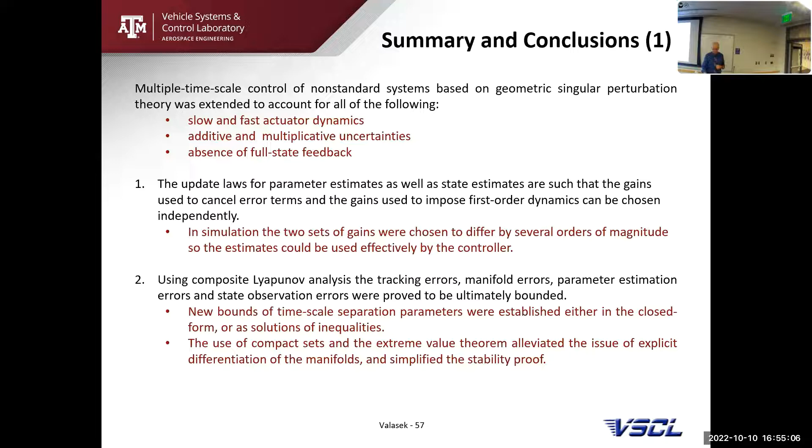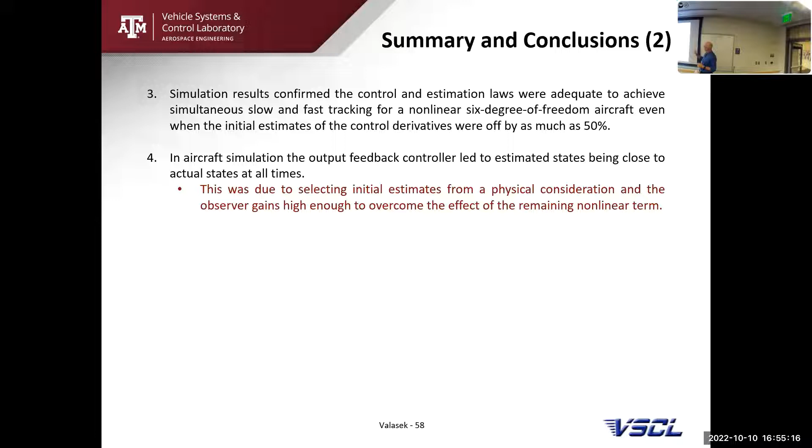The control estimation laws were adequate to achieve good simultaneous slow-fast tracking, even when the initial estimates were off by 50%. And the output feedback control led to estimated states being close to the actual states.

So where's this going after this? Naturally, I want to account for exogenous inputs and do it in stochastic rather than deterministic form—an unscented Kalman filter, or EnKF, using stochastic Lyapunov functions, is probably where that's going to go. That covers the unmeasured fast states in addition to the unmeasured slow states. Remember, we just assumed alpha hat and beta hat—I didn't say anything about the fast states being unmeasured. That was just the slow ones only.

Chris Leshikar's dissertation topic is to go single-rate and multi-rate with this, and then add in uncertain dynamics—uncertainty in the structure of the dynamics. We had parameter uncertainty of inertias and things; now we're going to go after the structure of the dynamics being uncertain.

That's his dissertation. And then Kameron Eves, who's defending in early spring—probably by February—has been looking at adaptive control for multiple timescale systems to account for this. For a while people were saying that was a difficult thing to do, almost couldn't do it, but he's got really good results. There's SciTech, ACC, and CDC papers going on in this. There's a lot of work now—he's got that going. So that's our future work and the people doing it.

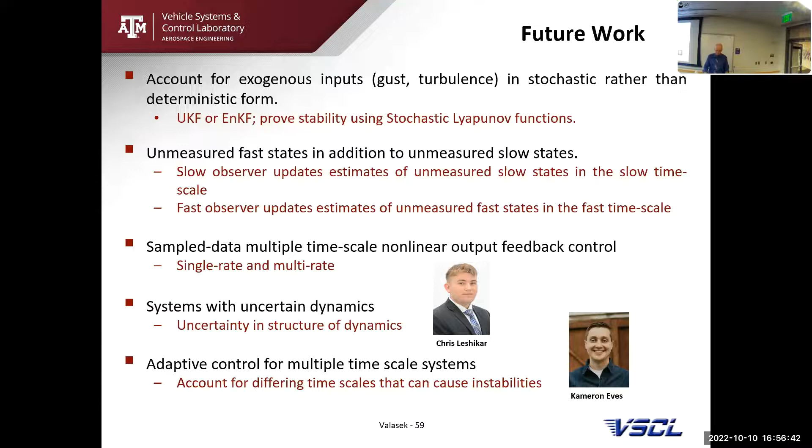Okay. I made it. Questions?

All right, Karen—yes, hold. No, great talk, thank you.

So you mentioned when you had to design the Lyapunov function that you just kind of chose one you wanted and made it work. But the feeling I get is it's generally hard to come up with a Lyapunov function—do you have more insight into that, and how do you make sure the cross terms were handled?

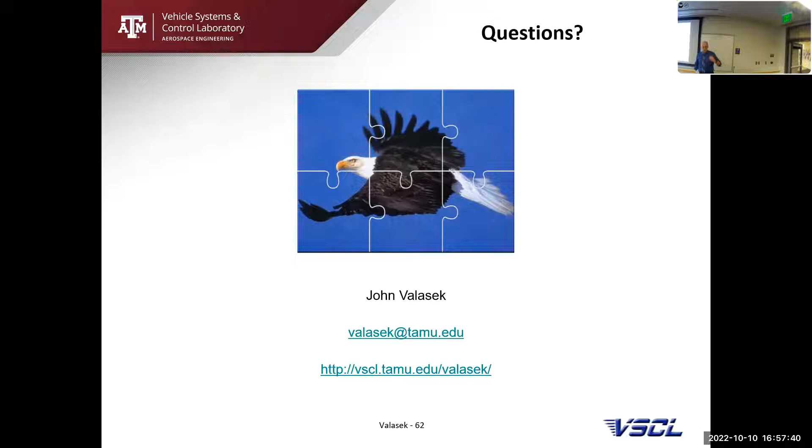Exactly, so let me go back. In the early system, that second order system and the early things, we were just picking those arbitrarily. Once we got to this, we're going composite Lyapunov function, so now it mattered—see what I'm saying? For this, I've got V1, V2, V3, V4, and then the trace of the B matrices and the lambda matrices. This is long.

Early on, yeah, you can use anything you want, but to get where we needed to go for this, we're using composite. A lot of the reason to go at it that way was to get an observer—by putting this in to get the observer, that's where we went. So this part definitely was not ad hoc; this was very, very carefully planned out to get that. That took a lot of work, yeah.

I'm still—none of us are happy about this. We've just had to do that for expediency. It worked—I personally don't care if it's an observer, though some people really don't like those. Some people have thrown fairly good sized rocks at us for using an observer instead of an estimator, but it works. It's a nonlinear observer, so—great question.

You said the controller gains in this one—I said kind of trial and error type setup. So can there be some optimization of the gains?

Oh, great idea. So yes, we did not do anything to optimize the gains at all. Those were picked—we were just picking unity for all of them and then having to adjust them as we went. And if you're wondering how long that takes—as a PhD student, you know, Dipanjan, how long did that take, how's that going?

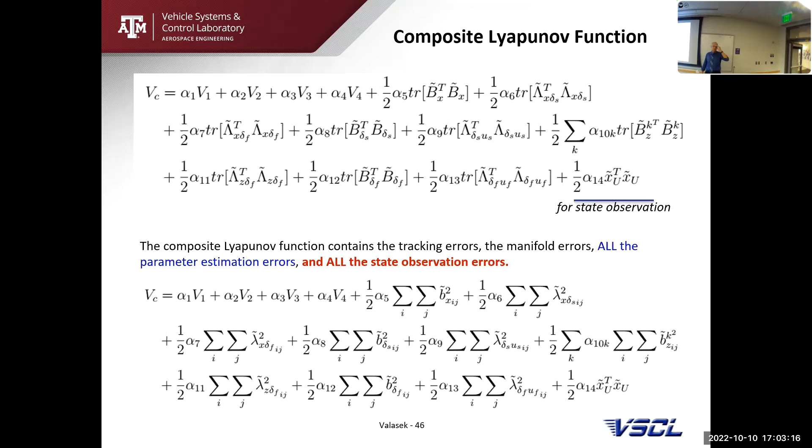But we're also heading toward that—as I said, Chris Leshkar will be doing modeling now where not just the parameters are uncertain, but the formula of the equations itself is uncertain. You don't know that well, and I don't know exactly where that's going to go yet. But yeah, plasma, enzyme kinetics, lasers—there are so many different areas where I don't do work, but people are saying, oh yeah, we could do this.